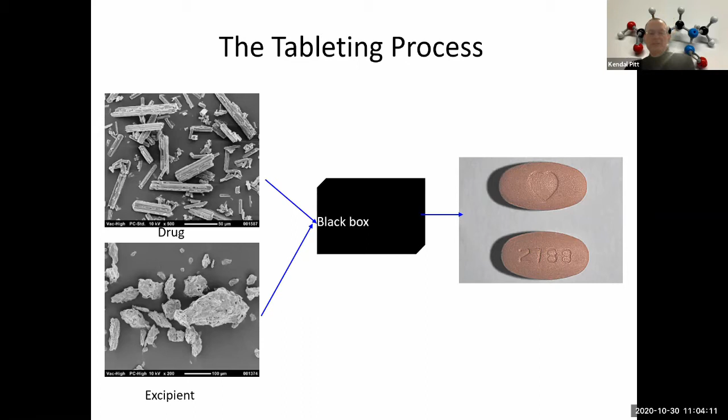So the take-home message from this is, when you're ordering or looking at drugs, for example, don't just look at what the chemical analysis says. You've got to think a bit more if you want to process these things. What's the size, the shape, the surface area, or any of these other things?

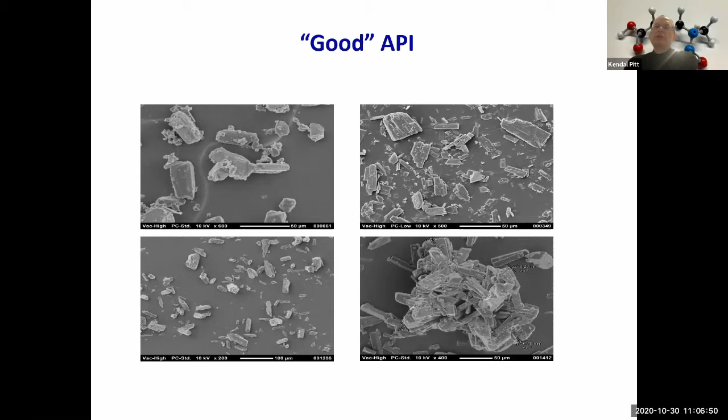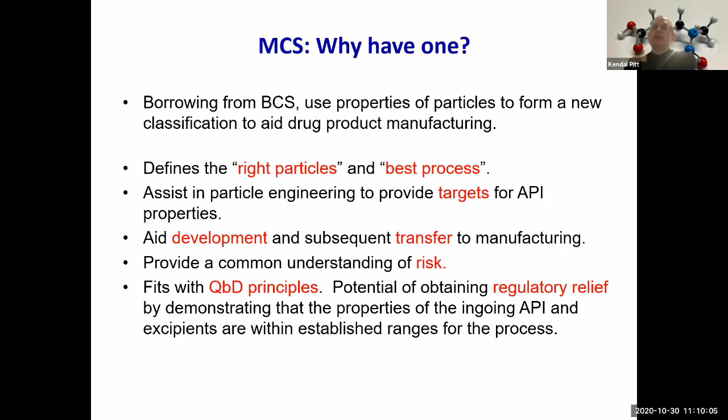On that. Next slide, please.

So how do we go about setting up this manufacturing classification system? Well, we had a meeting. It was under the Academy of Pharmaceutical Sciences. It seems it's actually quite a long time ago now. It's 2013 at University of Nottingham. And what we did is we assembled people, breakout sessions.

We asked people, if you were a synthetic chemist, what would you be interested in from a particle perspective? If you're an analytical chemist, what would you want? If you're a formulator? And sort of grossly over-exaggerating results, what you tended to find is that synthetic chemists were mainly interested in the purity. Analytical chemists wanted a chromophore in the product. Biopharmaceutics people wanted it absorbed, and manufacturing people wanted it to flow and to be able to compress. So we then started putting rules and some guidance around those concepts to come up with a classification system.

Next slide, please. Now, we were helped to a certain extent because we were able to pull upon some existing literature. This is one from Bruno Hancock's group back in 2004 at Pfizer. It talks about the ideal particles for direct compression, and there's a list of things like size, blend uniformity, flow, compression. And in the same slide we also put together this concept of a gradation, whereby if it's an easy particle, if it flows well, you consider direct compression. If it's got some concerns, you dry granulate, wet granulate if it's difficult, and then you've got the other technologies where you need to think very carefully about what the changes are.

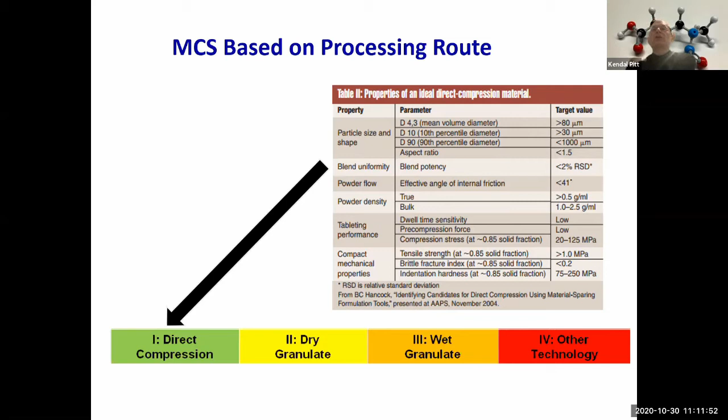So next slide, please. So we're all on the same page, this is a standardization of what direct compression is. You particle size or grind a drug, you blend it, and then you compress it. Now, this is clearly the most economical way to proceed. It's very simple in the sense that there's only one or two steps in it. But you're highly dependent upon your API properties. They've got to be able to flow, they've got to be able to compress, and they mustn't segregate. So very easy systems to run if you get a good API. But what if your API properties change slightly? So that's a basic overview of direct compression. Moving on to the next slide.

This is dry granulation or roller compaction. Here you are grinding the drug, you're mixing with excipients, then you roller compact it, usually into a ribbon, then you grind it again, mix again with extra-granular excipients, and compress. So you may well ask, what are you doing here? Typically your input drug at the start is very fine material, maybe below 50 microns in size. When you've roller compacted it into a ribbon and milled it again, you're typically more like 750 to 1,000 microns.

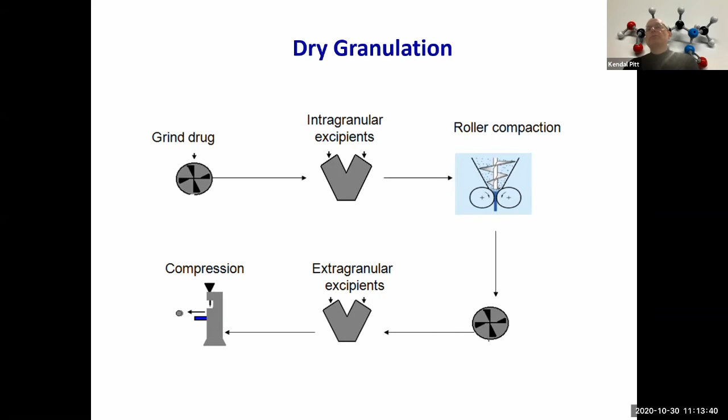So you've increased your particle size from below 50 microns, which doesn't tend to flow very well, to something which is usable. Chemical engineers and manufacturing people tend to like this, because there's lots of knobs and dials and things you can change. So if your API changes early on in the grinding of the drug, or prior to that in synthesis, you've got some opportunity to change its properties before you have to make tablets from it.

Next slide, please. This is wet granulation. In this case, you're grinding the drug, you're blending it, you're then applying solution onto it, usually water. You're sieving it, drying it, sieving it again, and then blending it through. Some people refer to this as chemical torture for the API. To get it through this, you've got to have something which is both stable to water and also stable to heat. And you're also possibly changing its form as well. So you need to think carefully about wet granulation and reserve that for special cases.

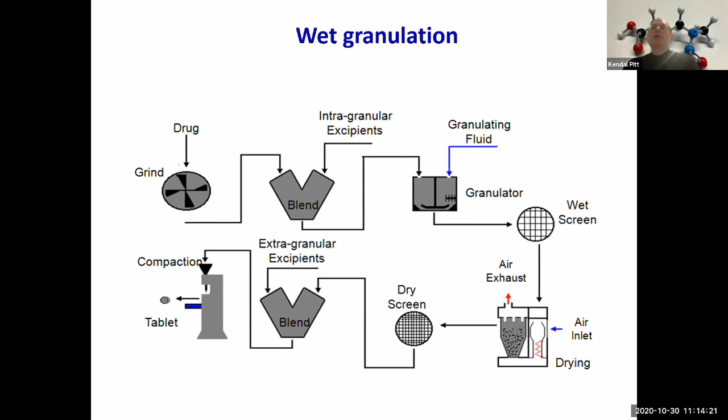So next slide, please. The output from these deliberations at Nottingham was a paper, the manufacturing classification paper. You can readily download this off the internet. It was by Michael Leane, myself, Gavin Reynolds, and some other people. I suggest you Google my name and Gavin Reynolds' name, because there's a singer called Michael Leane, so you get about six pages of his songs before you get to this paper. So just Google myself and Gavin and you'll get the paper.

Part of this was interactive, a questionnaire. So we're going to stop and have the second poll now. The second poll will be, what do you consider to be important? So it's come up. What material properties do you think are important in selection of a manufacturing process? Is it size, shape, surface area, surface energy? So you know what to do. Jab your fingers at the screen or click, and you can pick a number of those if you like. I'll give you a few seconds to do that. Thanks.

Okay, here we have, it's interesting. So it's interesting that quite a lot of you have gone for the size and shape, surface area, and surface energy. It's quite interesting to see how that is. You can see the importance of the things which we looked at.

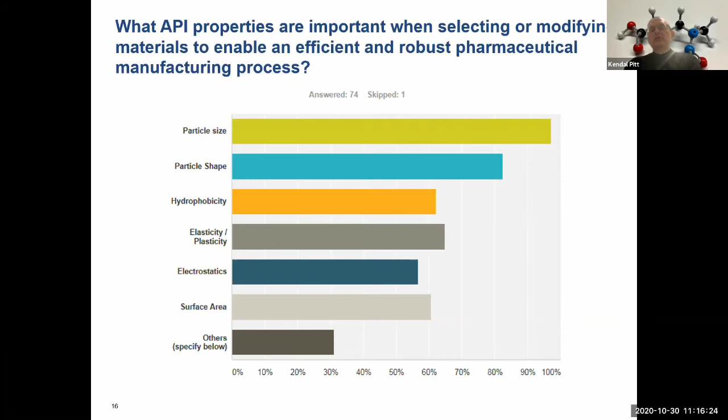So it's okay having this decision that these are what are important. What are you going to do about measuring this? What can you do? Next slide, please. One way of looking at this, sorry, can you open all the question all the way down? Sorry, shouldn't have it build in that. So yeah, these are the sort of measurements which we then went out and asked people to check.

So particle size, we asked to look at 50%, what's 50% by size, what's 10%, 90%. Particle shape, circularity: if it's a round soccer ball, then it's circularity of 1. If it's a rugby ball, then it's 2. If it's like spaghetti, it's particle shape about 10. Compression, we were looking at the mechanical strength of the particles. Flow, we were using Carr index, and dynamic vapor sorption.

These are ideas which we put out. This is sometimes referred to as the FIP friendly list, which is the Federation of International Pharmaceutical Societies. Anyone can do these at minimal cost. I work in manufacturing. If you also work in manufacturing, we know that money is always hard. All the money has been given to R&D to gamble on new products. So we can get all our sites doing this very easily with very little equipment if we have to, bearing in mind GSK operates worldwide around the globe.

Some interesting quotes. This you can do in a minimal list. Something to think about: no product should fail from a predictable reason. If you look at some of these rules and some of the suggestions there, then you can start rethinking, well, we should never have done wet granulation, or we should have done direct compression.

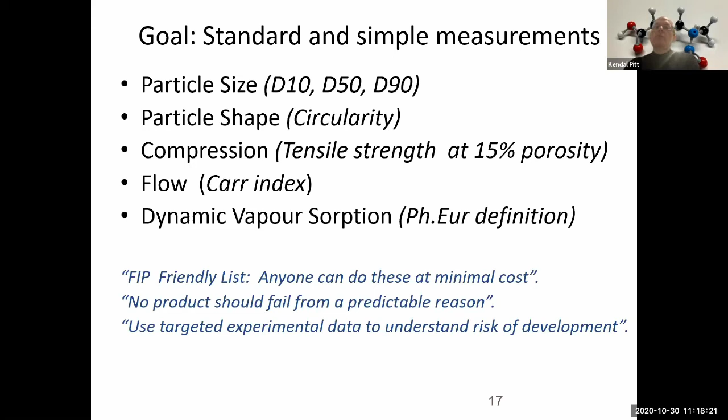The other part of taking these measurements is none of us have infinite resource. So this gives you some idea, if you take these measurements, of what further areas you need to concentrate on. Is electrostatics going to be an issue for you, for example? It's something you need to do on that. So I'll give you some quick examples of this and ones that you used. Next slide, please.

The other thing we tend to record is the mechanical strength of compacts. I'm usually told that if you put an equation up, about 50% of the audience drop off. So hopefully there's slightly more than 25 of you left now on the call. But you can see it's an equation.

What it does, it's the 2P. The P is your fracture load, or your hardness. D is diameter, T is the thickness. So it actually takes out the size effects of your tablet. The bigger the tablet, the bigger the fracture load should be. But you get a target. If you solve that equation, it comes to 2 megapascals. And that's sort of the goal, people out there.

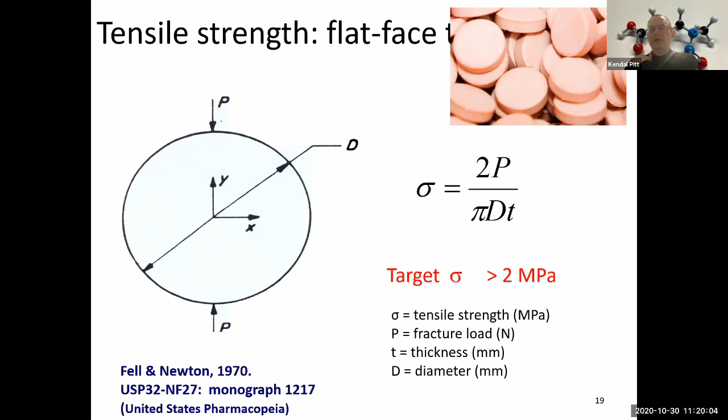Again, flow: you can use complicated systems like shear cells, but the usual easiest way is just to use compressibility, Carr index. And this is an example of ranking what future work you may need to consider. In the Carr index, you fill your measuring cylinder with powder, tip it end over end, get one volume, and then you tap it down and get another volume, and the difference gives you an idea of the flowability. So the more it collapses, the poorer the flow.

So you see in this thing here, you've got a green zone where if you've got these Carr indexes of 20%, you should have no real issues in scale-up in manufacturing. It should come out of all your hoppers, you should be able to move it around on screw augers and things like that. The amber zone is probably the interesting zone. This is an example where you probably need to do more work because these powders will get stuck at some point if they're 21 to 25% Carr index.

And you could even Google and Wikipedia this, and it will tell you you will have problems with these sort of powders. So it probably means you need to think about your equipment. And then the red zone is where you definitely will have problems in flow. You will be around with that GMP mallet coming out to hit the sides of a hopper; GMP sticks I've seen used as well. There will be issues with those. And that sort of gives you the guidance of what future work you may need to do or what formulation work you need to do to get around that.

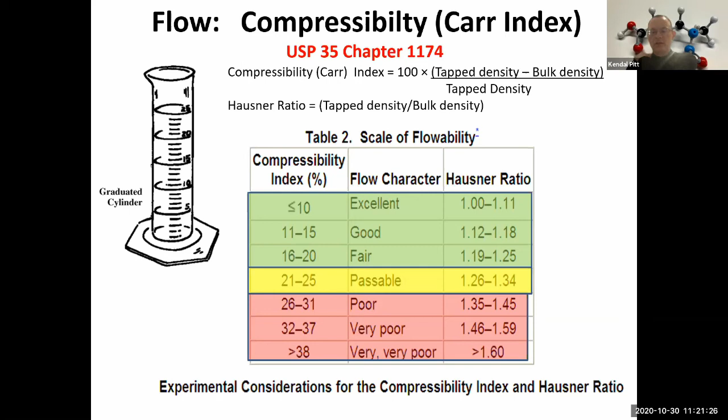Next slide, please. This is an interesting example of when we're looking at surface energy or looking at absorption. In this case, along the bottom, we've got the percentage RH of the air that you are in. And on the y-axis, the vertical axis, you've got how much water has been taken up. If you have lots of money, you use gravimetric vapour sorption GVS systems, or if you haven't got money, you use a desiccator or glass jar on the left and start weighing the powders individually.

But you can see that there's clearly two populations here. There's one along the bottom, which doesn't pick up moisture, and there's a particular example which does pick up a lot of moisture. And if you look at European Pharmacopoeia definitions, the one which is in blue at the top is shown as being slightly hygroscopic.

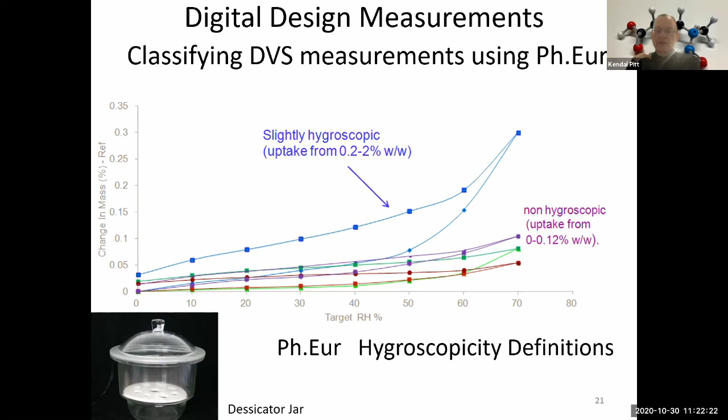So what was interesting in this particular example, if you go to the next slide, please, you'll see that on this side, we've got a compaction pressure. That's the pressure we use to form the compact. And on the vertical axis, we've got the tensile strength, the magic 2 sitting there. What you can see is the slightly hygroscopic one actually gave us higher mechanical strength tablets.

This is where we were thinking about, well, what is this? It's possibly something to do with surface energy. The higher the surface energy, the more moisture it's going to pick up, and also the more surface energy it's got, it's probably going to form bonds better. The upside of this was that the slightly hygroscopic one was actually the better product to take forward and actually formed tablets a lot better.

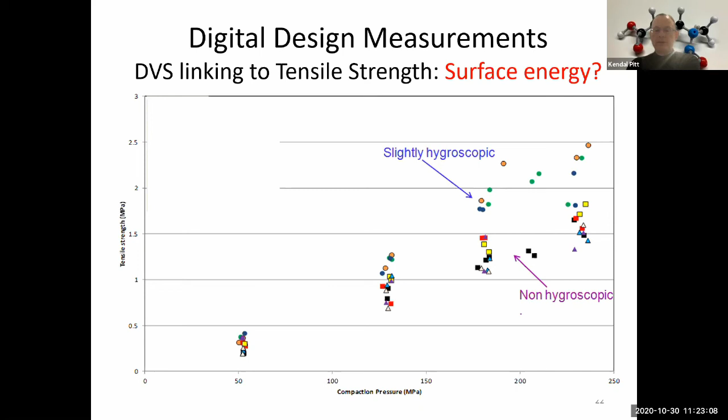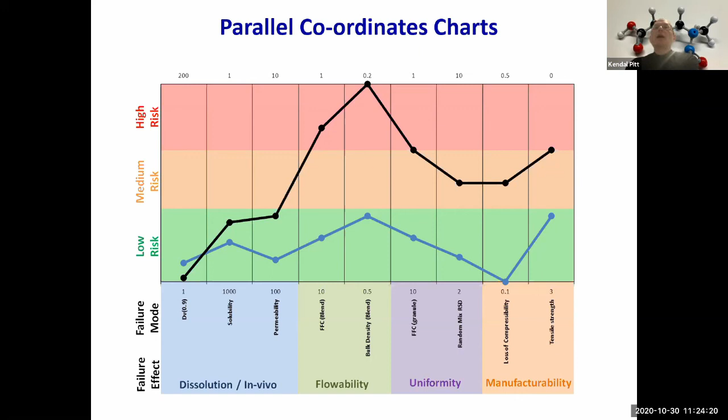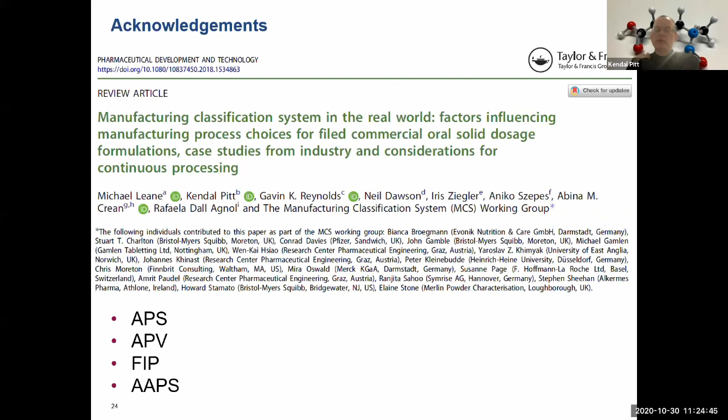Final slide, please, on this. I've been through this fairly quickly. This is the last paper, which is paper 2. This is very much a team effort in developing this project and this concept along. By all means, look at the papers, come back with suggestions, and if you want to join the team, then contact any of the authors up the top there, and we'll more than willingly bring you in.